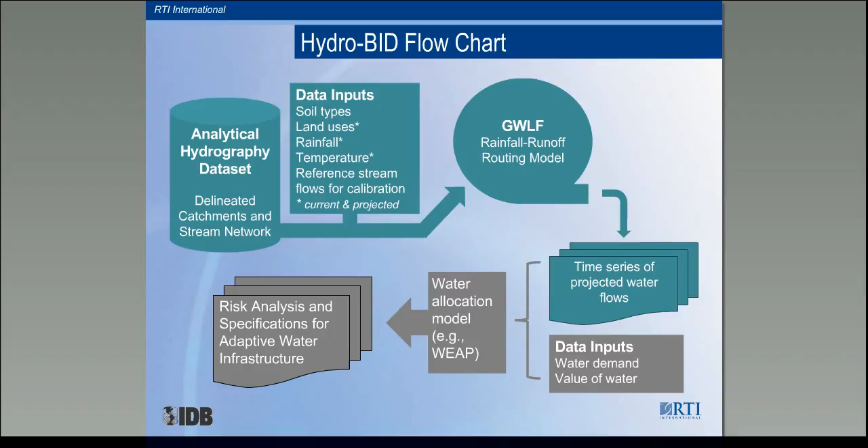The Analytical Hydrography Dataset is based on topographic data that is obtained from the shuttle. And this is processed in a way that allows you to locate both polygons as well as line segments. The polygons are the catchments, and these catchments are all less than 100 square kilometers. And then the stream segments are generally of an average length of about 11 kilometers. And the stream segments are connected. So we have a direction of flow indicator at each of the junction points. And so we can track flow throughout the entire basin from the upper reaches to the outflow point.

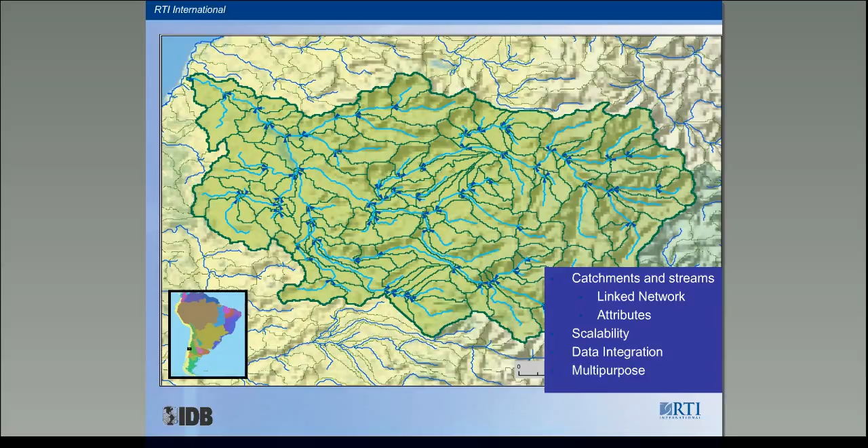And this has been prepared. It's possible to increase or decrease the scale of the area that you want to model. And so you can look at an entire basin as huge as the Amazon. You can look at sub-basins within that area, and you can navigate both upstream, as in this case, or downstream. You can pick a location, and you can determine all of the locations downstream to which water will flow from that catchment. And so you can track flow downstream as well as measuring the total flow for an area as you choose to define it.

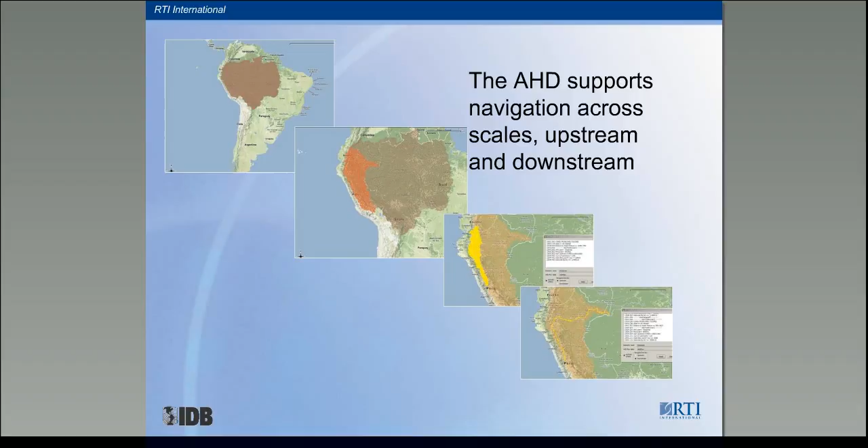In Central America, the system now contains 33,000 catchments. For the Caribbean nations, it's, of course, a much smaller number. And for all of the South American continent, 193,000 catchments. And so it's a very comprehensive system. And this is already programmed and ready for use by institutions within the member states of the IDB. This is a system that is owned by IDB, and they are going to determine the rules and conditions under which it is used.

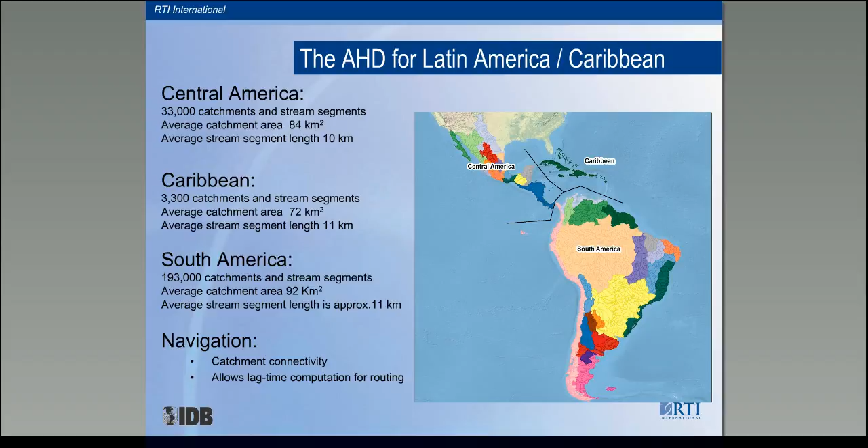My understanding at this point is that they plan to make it available through their website under a memorandum of understanding with users that will require that those user organizations participate in a community of practice, that they receive training in the use of the system, that they share results of their use of the system so that can become part of the combined experience and can provide feedback on improvements over time. We'll see how that gets rolled out over the next 6 months to a year, but that's my understanding of it. What they have are the executable files and all of the data sets that we've created for them, which they can now make available just from electronic copy, but ultimately will be downloadable from there.

But basically, what the model does is it partitions. There's a certain amount of precipitation which is measured or modeled, and that is then divided into the amount that infiltrates and the amount that runs off to streams or to other surface water bodies. The water that infiltrates into the surface may then evaporate, or it may infiltrate further into a shallow saturated zone, which then passes through groundwater flow to surface water features, or it passes all the way into deep saturated zones and is stored but basically lost to surface water flow.

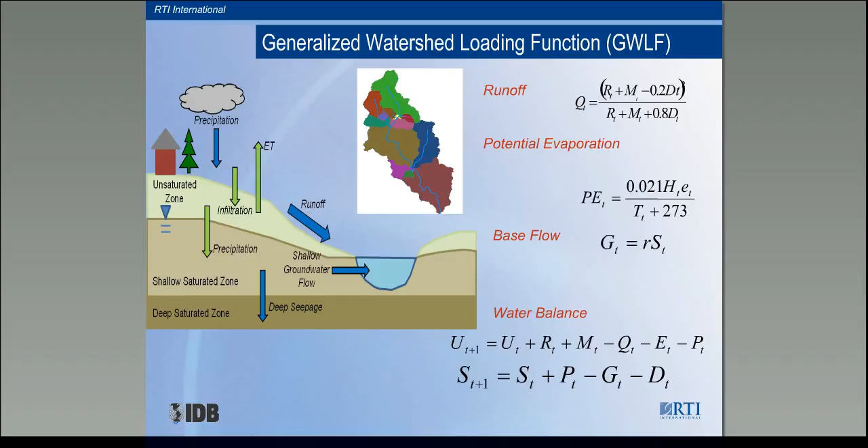The amount of water that winds up in the river or the stream depends on a lot of factors. It depends on the amount of precipitation. It depends on the types of soil. It depends on the land use, whether this is an urban area, a rural area, whether it's farmed or forested. It also depends on the temperature, because that affects evapotranspiration. So all of these factors, soil type, land use, temperature, and amount of rainfall are really the determinants for how much water flows into a stream. And therefore, those are the types of data that we need to collect in order to run this model.

The information is obtained from a number of different sources, and it can be obtained from international organizations, NOAA, NASA, et cetera, or if there are local data sources that are reliable and have information in a form that can be captured and used, then we can use that as well. But we need to populate the model and the AHD with data of these types.

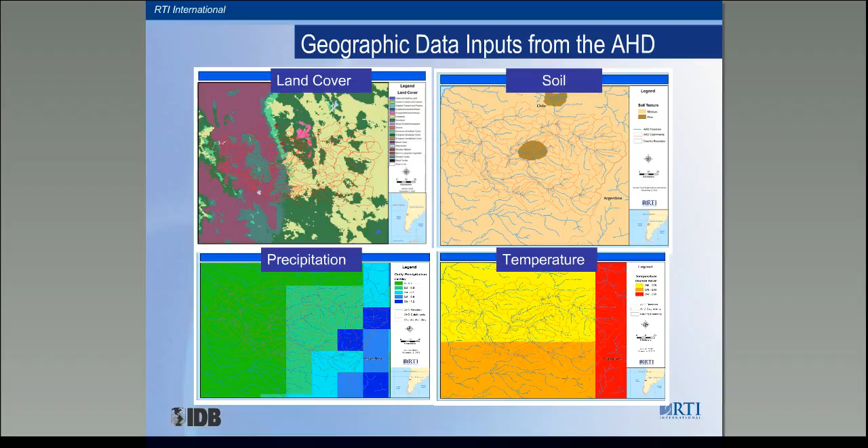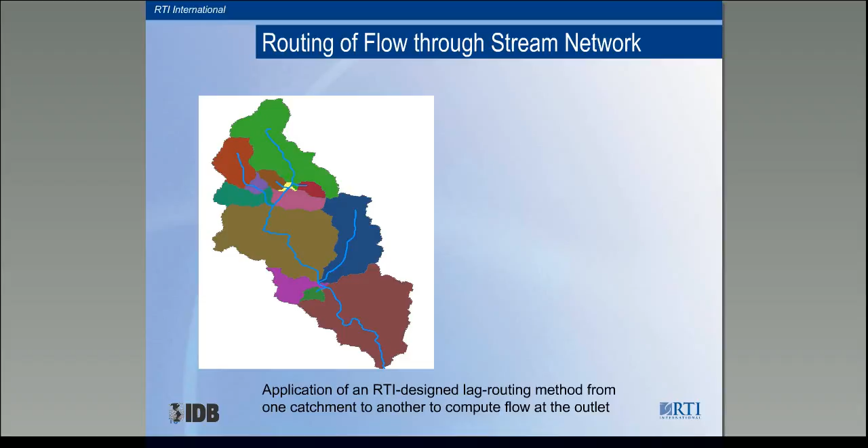And then the flows are calculated for each stream segment and are traced down to the outflow point. So the model runs iteratively. It determines the rainfall in this area, takes other factors into account, determines what the outflow is at the outflow point, and then sums outflow from all of the stream segments that are coming to that point, and then continues downstream in order to generate flows at the outflow point. And as a user, you can specify whether you want to know outflow series at this point, or that point.

The intended uses for the system are varied. What unites them is that they all depend on an understanding and ability to project water flow. And so whether you're doing a general water resources assessment and trying to allocate available water to various uses, or whether you're trying to work on more specific project applications, planning an irrigation project, forecasting the capacity of a hydroelectric installation, or looking at the sufficiency of water for urban water supply. Those are uses of flow data.

And also looking at trying to estimate the needs for maintaining ecosystems, or whether or not there are going to be eco deficits in water supply to particular ecosystems. That's another application. In phase 2 of this effort, IDB is trying to line up specific projects that are currently being developed within the bank that touch on as many of these applications as possible.

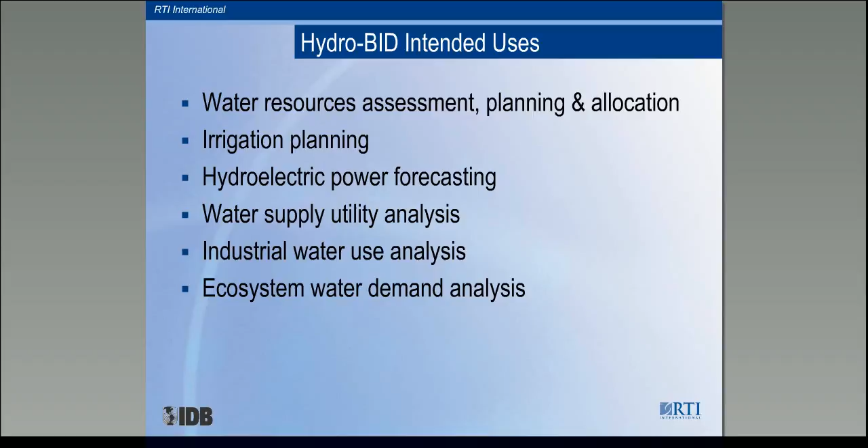So I'm going to stop there and just take a breath and see if you have any questions so far, because I'm about to launch into the case study. The original modeling is daily, but we summarize that on a monthly or yearly basis.

In Latin America, there are quite a few challenges in terms of stations and the quality of the precipitation data, and you end up even filling gaps with all the statistical analysis. So it's a big challenge, and I don't know what type of network you use for precipitation, or how that is input by the user, or how that works.

I'm going to illustrate the answer to that question in just a minute. The benefit of being able to expand or focus the area of interest for this model is that we can capture an area for which there is more reliable original monitoring data. So you'll see in a minute that in this case study, we experienced exactly that. We were trying to model a particular basin for which there was inadequate data available. We were able to expand the scope and look at other sites where there was more adequate monitoring data.

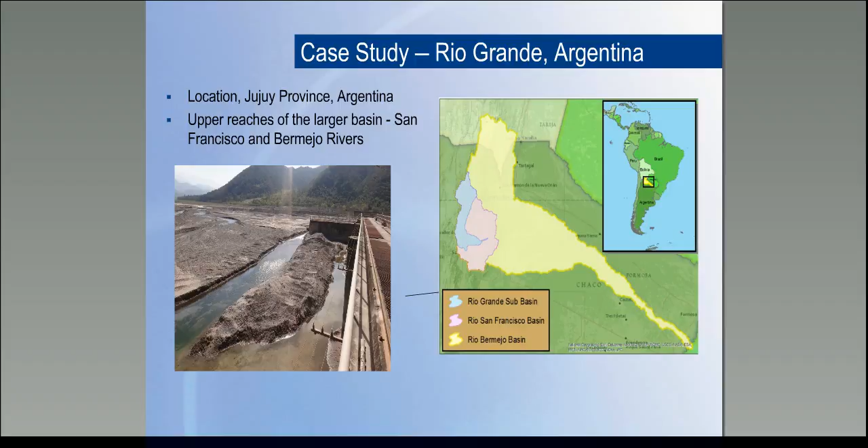So the specific objective of this case study: model the Rio Grande subbasin and identify adaptation measures that can help meet future urban water demand for San Salvador, as well as irrigation water demand south of the city. What I'm going to describe is a standard set of steps. We wanted to estimate water demand, both for urban use and irrigation use. We used the HydroBID model to estimate water flows, and then we used those two results in order to characterize unmet water demand. What are the shortages? And then we looked at a couple of adaptation options for reducing unmet demand to determine which ones are effective, and to what extent. And then we looked at the cost of those measures to characterize cost effectiveness.

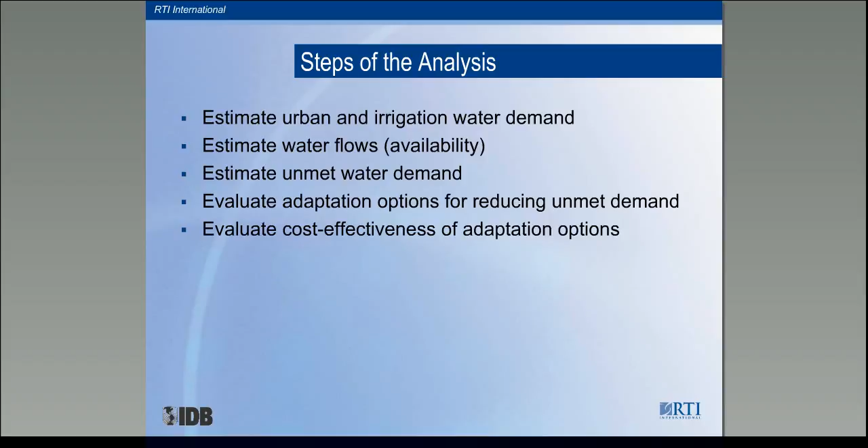Let me start by just describing the water distribution network, because obviously you've got to know where water's flowing and how things are connected before you can do this kind of analysis. The Rio Grande flows into the Los Molinos dike, which I showed you in the picture. Water is taken off of that and conveyed to San Salvador, and there's some return flows to the main stem of the Rio Grande below San Salvador. Water is also taken off the dike to supply two other reservoirs, the main one of which is La Maderas.

And after Las Maderas, there is a small hydropower plant and a series of irrigation offtakes to support sugar cane and tobacco. There's also some water use for processing the sugar and the tobacco. That's the industrial use that you'll see. There are also some small towns, Palpala, El Carmen, which take water off of smaller dams, and there's some smaller rivers, Alisos and Perico. You'll see some figures later on for estimated flows for Los Alisos and Perico. This is where they come in.

But for purposes of the analysis, we assumed that all of the storage was in one dam. We didn't look at flows in between these, and we were really just looking at irrigation demand overall, not by field or by system. And so for purposes of the analysis, we looked at San Salvador, the other towns, and irrigation as the main uses.

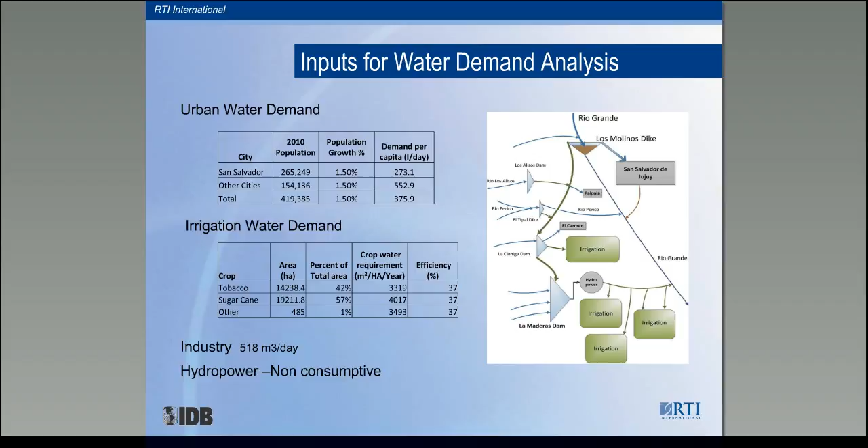And then, not surprisingly, a standard result that you find in many different locations: the irrigation demand is considerably greater than consumption by urban uses, about 5 times under current circumstances.

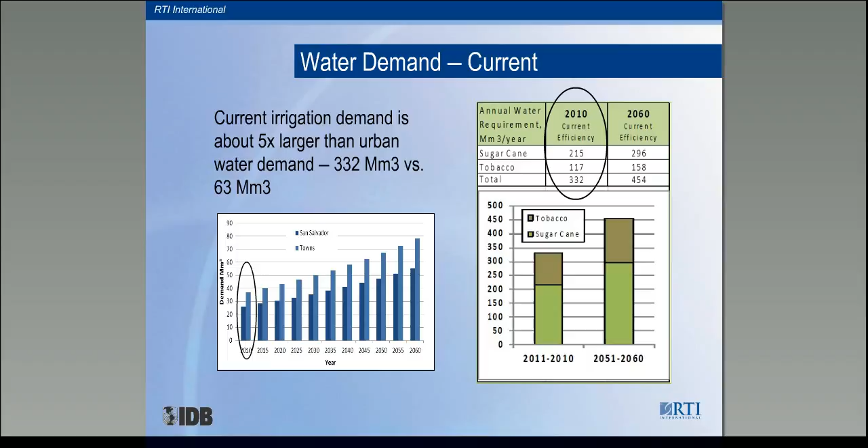And then we also looked at modeling future climate as a way of trying to determine what future water demand would be. And these were also the climate scenarios that we used for estimating future water availability and flows. We actually looked at 2 different ways of getting climate information, one from Climate Wizard, and then also downscaling several different climate models. We contracted with CIMA, which is a meteorological institute in Argentina, which has developed its own ensemble of climate models for the region, and so we used theirs as well.

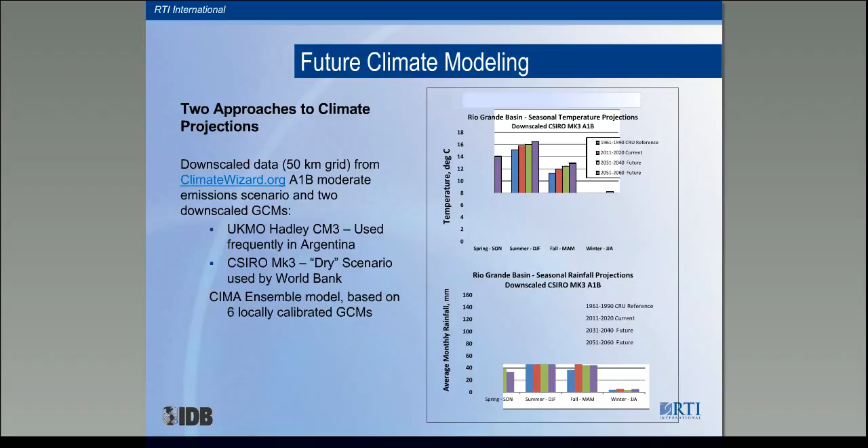We didn't find many significant differences among the different climate models, so I won't be describing in detail how the results from one model differed from another. The results were relatively consistent across the various climate projections. We looked 50 years out, and actually urban water demand increases more rapidly than the irrigation water demand, in part because our understanding is that the irrigable area is already fully developed and fully cropped. So the main driving force for increasing irrigation water demand is really the increases in temperature and evapotranspiration.

So making some reasonable assumptions about population growth and a bit of increase in other uses in urban areas, it looks like 50 years out, irrigation demand will still be 3 times what urban demand is, and both of them will be considerably higher than they are now. So that's the first step, looking at demand.

Second step is how much water is available. And this is where I get back to the question that you were asking. The Rio Grande Basin is outlined in yellow here. And the part that is a bit browner or pinker is the Rio San Francisco, which is the larger basin within which the Rio Grande sits. And Jujuy, our area of interest, is up here.

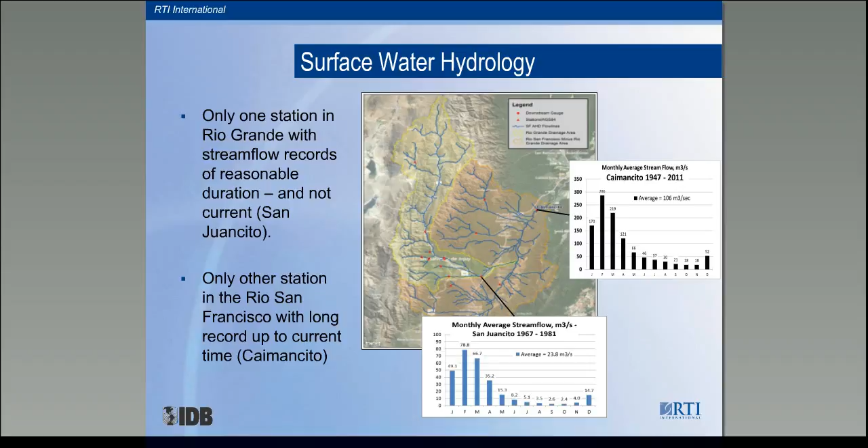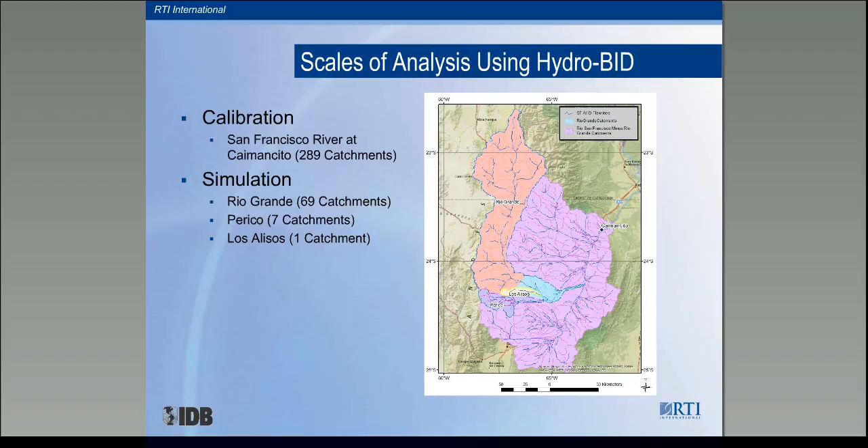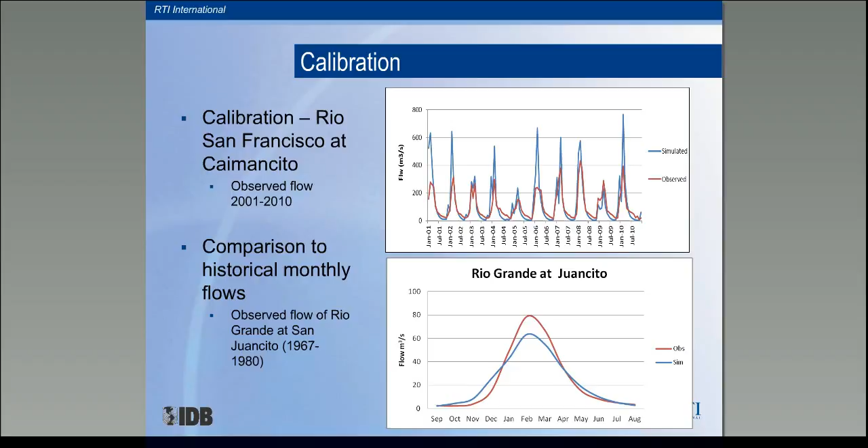And then, once the model was parameterized and calibrated, we were able to then predict flows at Rio Grande in a way that was fairly close to the historical record that was available through 1980. We felt like that was an adequate match to give us reliable results. We then took the climate scenarios that I described, 4 different climate scenarios, and produced daily flows that were then summarized to monthly and annual flows at the Los Molinos as well as the other points.

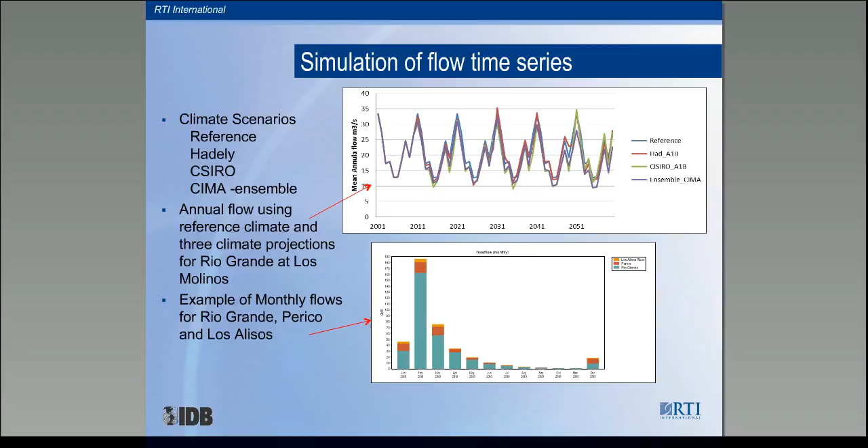And those were the results. Again, not very much difference in the projections based on using the different climate models. Any questions so far?

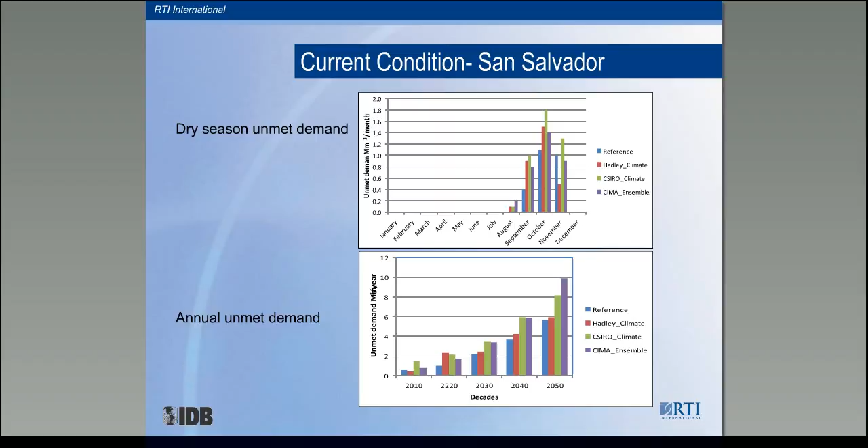That's for irrigation. This is the same picture for urban. Of course, the scales are much different. And also for the other towns. Again, shortages increasing over time, but on a much smaller scale than for San Salvador.

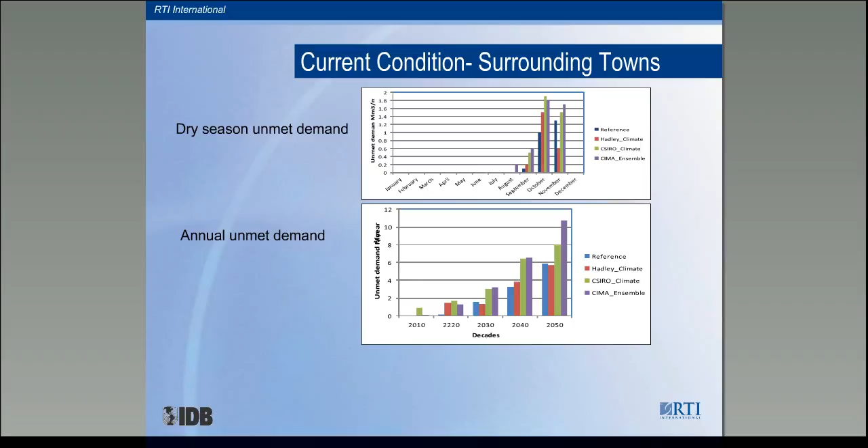So the adaptation options that we looked at were, of course, a base case where there are really no changes. Irrigation efficiency remains at 37%, and leakage in the urban water supply system remains at our assumed rate of 30%. Option 1 is to improve urban water efficiency by investing in water meters, reducing leakage, doing a better job of billing, and being able to overall reduce the amount of wastage in the system.

The second option was looking at improving irrigation efficiency, and this was a modest increase using targeted drip irrigation for crops without any improvements in the conveyance of water in the canals or to the fields. And so this would really be sort of step 1 in improving efficiency for irrigation systems. So it was shifting from basic furrow irrigation to a surface drip system. And then we looked at what the combined effects of those two would be.

I'm going to back up for a second. I don't think I emphasized this enough at the time. Remember that these systems are really disconnected. Water is taken off in 2 different directions, one to San Salvador and one to the dams and storage for irrigation. So in this particular network, improving efficiency in urban use doesn't gain you any additional water that can be used in the irrigation system because there's no connectivity to it. The outflows and return flows are below the offtake for the irrigation systems.

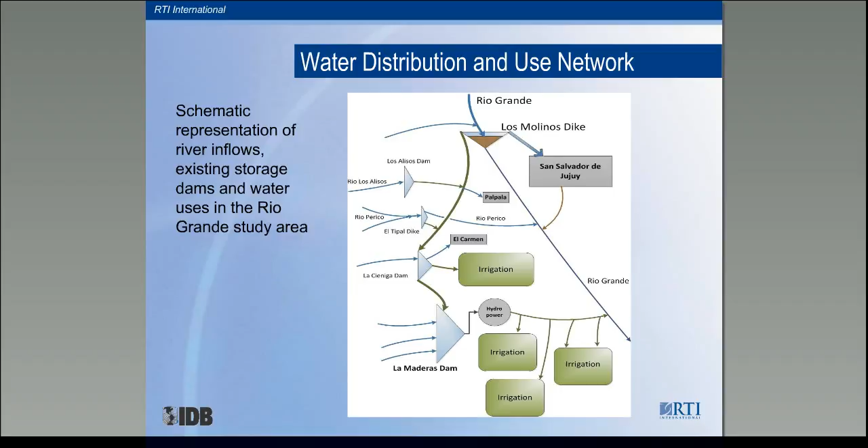Oops, sorry, wrong button. Okay, so we'll get back to where we were.

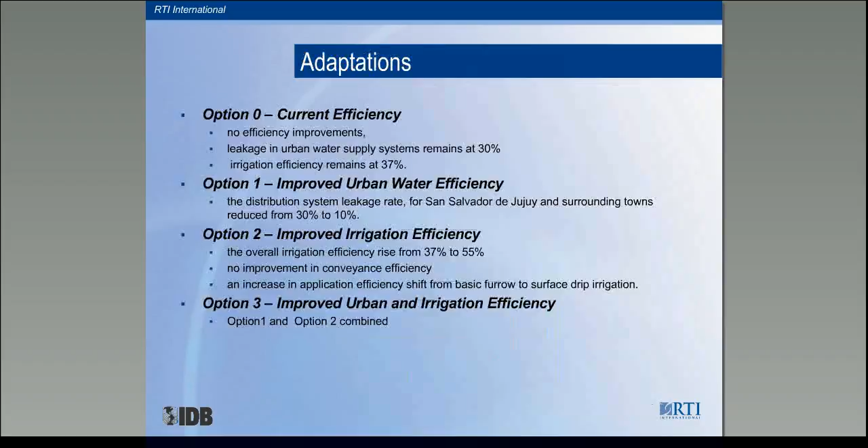So we're looking at these adaptation options. So for the urban system for San Salvador, basically improving efficiency, reducing losses from 30% to 10%, does alleviate some of the season demand, measured either by month or on an annual basis over a longer period of time. So there is some improvement. You can see the change in scales here. Unfortunately, when they put this figure together, they didn't keep the scales the same. So you'll see that the top measurement here is 12 million cubic meters, and this is 6. So this is really half of the original value.

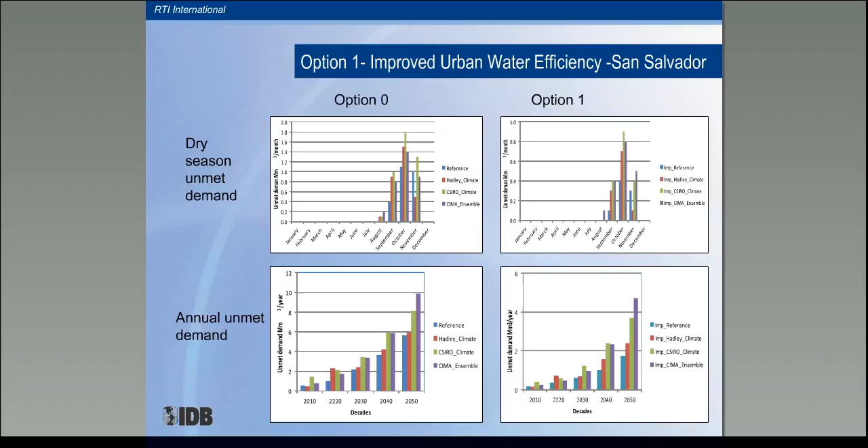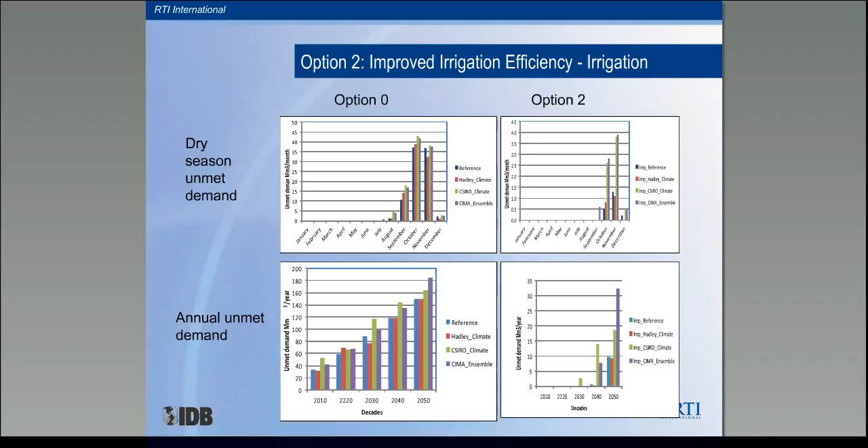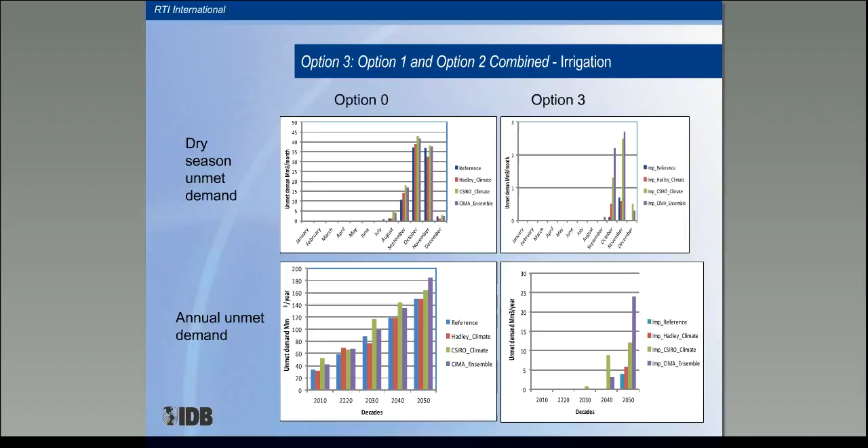There is a bit of additional improvement by doing both, but in some ways this is not meaningful because there's no interplay between the two systems. You can add up the improvements by doing both, and there is less unmet demand, but it's not because there's water being transferred between the two systems.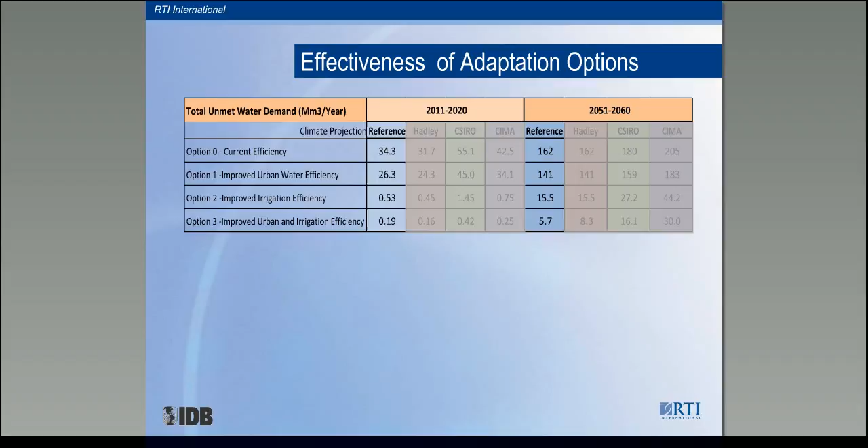Yeah, what were the assumptions as you are looking at scenarios up to 2060? What was your land use pattern? Because land use in that period of time could affect the hydrologic cycle even more than climate change, as a matter of fact. Absolutely. So, did you consider that? We considered it, but we were not able to really look at it very carefully.

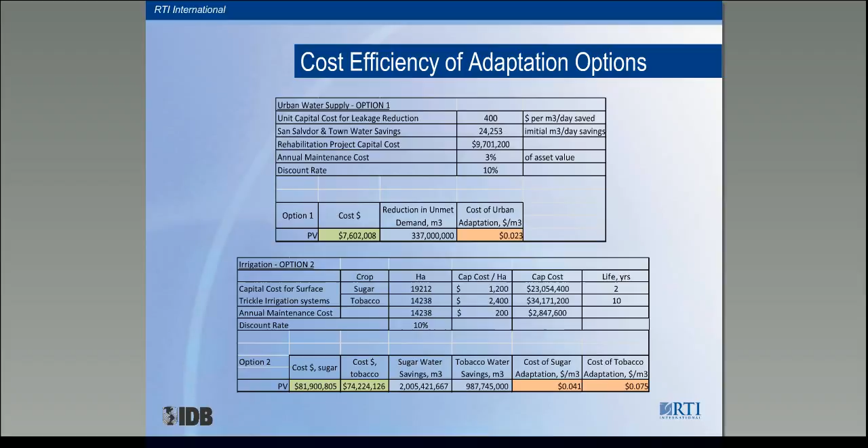Okay, so just to wrap up and then give a brief preview of what comes next. The purpose of this case study really was to just illustrate use of the system and to generate some results that we could show to folks in IDB and some of their member states. So the Hydrobid model was working, and it was capable of doing the modeling that we set out for it.

Over the period of interest of 50 years, really the impact of climate change on flows was small, regardless of which climate model we used. But there was quite a bit of increase in demand, both from population growth in the urban system, as well as increased evapotranspiration in the agricultural system. The conclusion really was, for this basin, improving irrigation efficiency is really the most critical intervention of those that we considered and looked at.

And so in phase 2 of this work, which will continue with the IDB, they have explicitly asked us to couple the surface water model with a groundwater model, so that we're able to look at availability of water and allocation of water from both surface and groundwater systems. We'll do a lot more work on economic modeling to tie this in with the kinds of economic assessments that have to be performed in order to justify infrastructure projects.